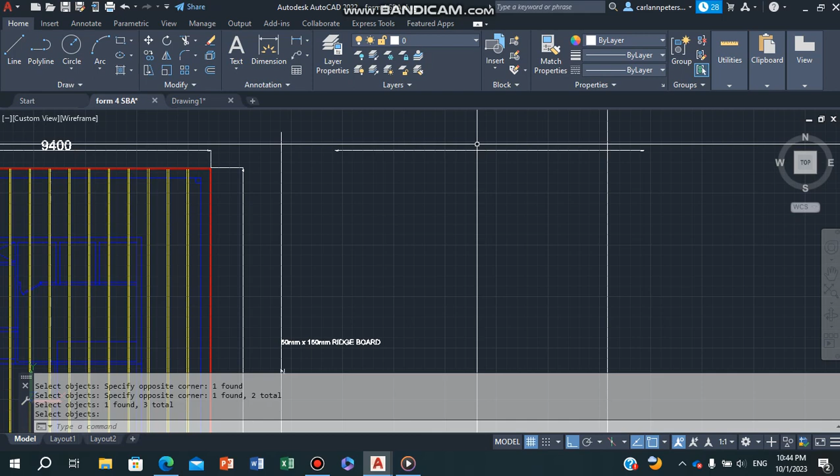So I'm going to explode it, enter, so that I can now remove the line here and the dimension figure. I am going to move or copy my leader line, put the tip of the arrow.

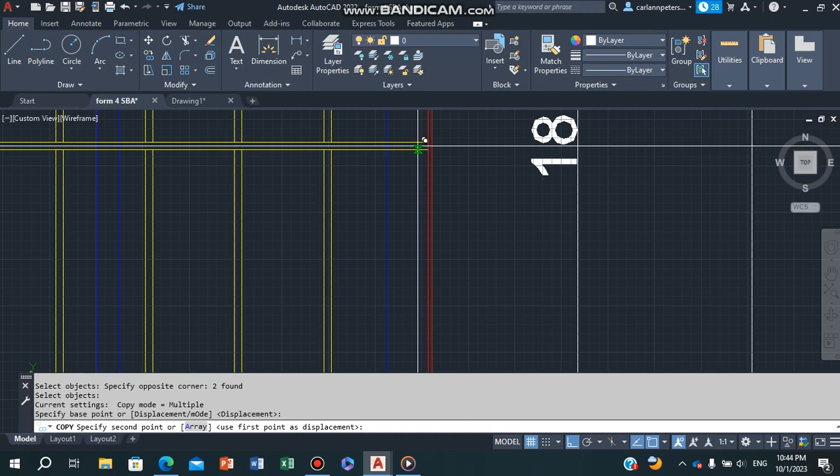What I want to show is, alright, I prefer to do it this way. This is my ridge board, so this is my ridge, so I draw the line. Where is my line? Where is my arrow? So I put it towards the middle here. Where is it?

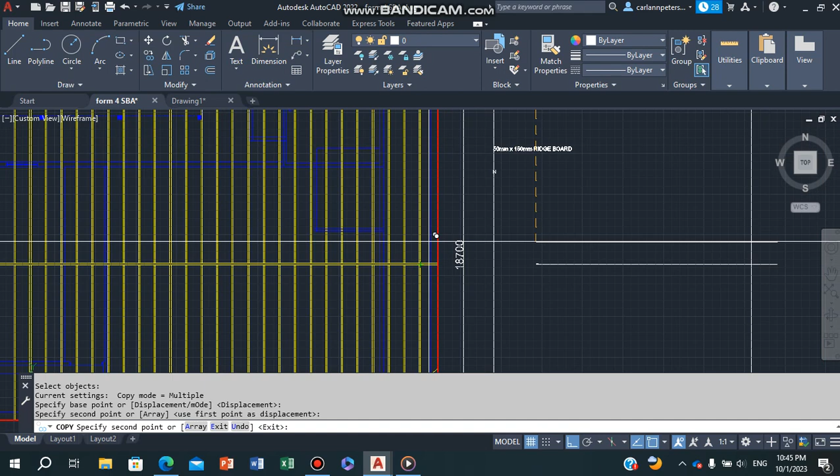You see, they want to show me to show a particular point. So what I will have to do is, alright, I will have to rotate this. Rotate.

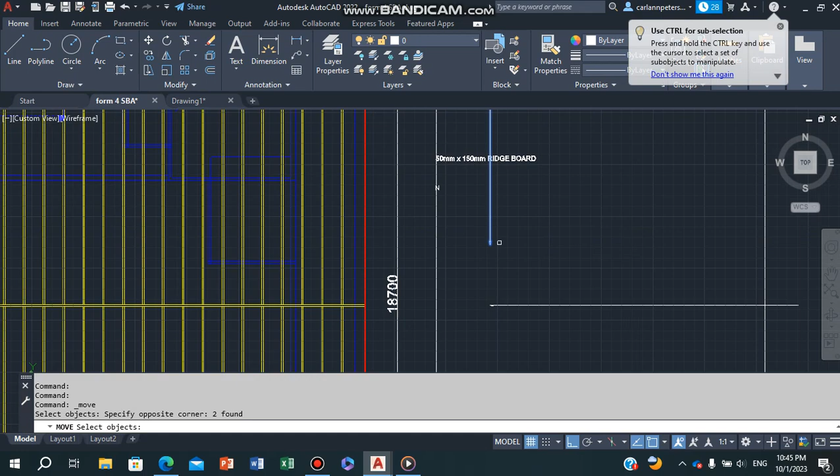Draw it vertical like that. Right, I rotate it and then I'm going to move. So I'm going to move this, take it from the tip, and I'm actually showing my ridge board. So the ridge board is this particular line.

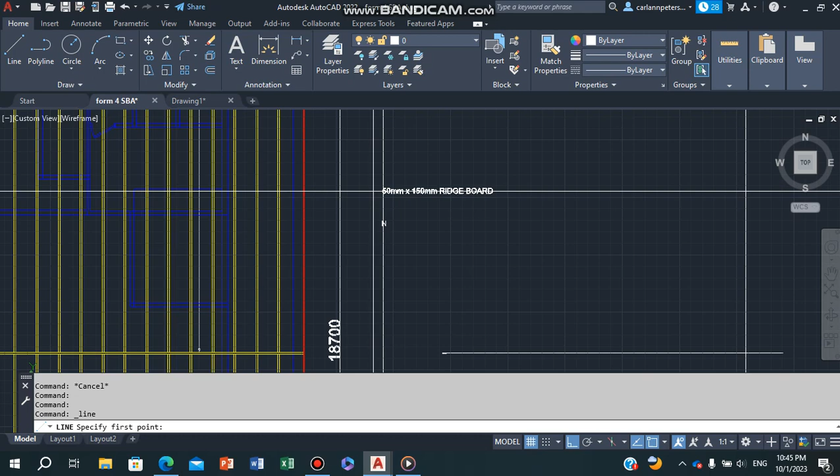So that arrow actually wanted to show a particular line, right? So let's follow, it comes from here, and I want my note to come from the ridge board to the notes. So I want to draw my line like that, and then I'm going to fillet it.

So it's the same thing like how you place notes for biology and so on, where you don't have notes crossing each other and so on. So the same procedure here.

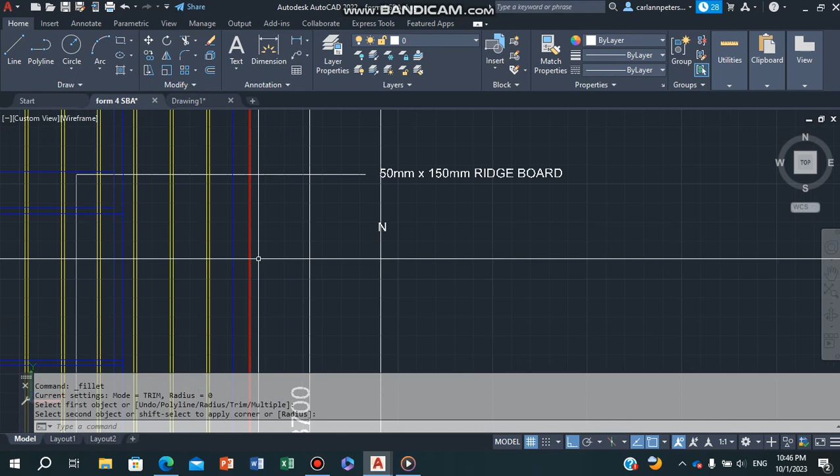When you're doing the corrugated metal sheeting, you will have your corrugated metal sheeting, and you will have your arrows to come to show your corrugated metal sheeting and so on. So that is how the notes and so for this will look.

And you put in all the other necessary items. Your second sheet is sheet 2, and then you have so you had floor plan, and then the next one will be the roof plan.

So I'll guide you with the other aspects of this, but I want you to be able to dimension, put on your notes, and so put on your arrowheads.

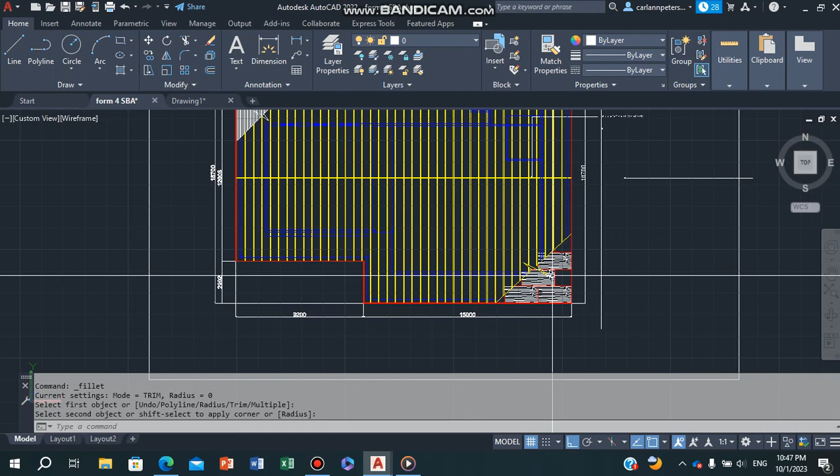Remember to finish your corrugate, not the groove ply. So try and finish a groove ply, and then you would trim off and so on, so you make it look good. So make sure you have your proper layers and so on. That is how you go about doing the roof plan.

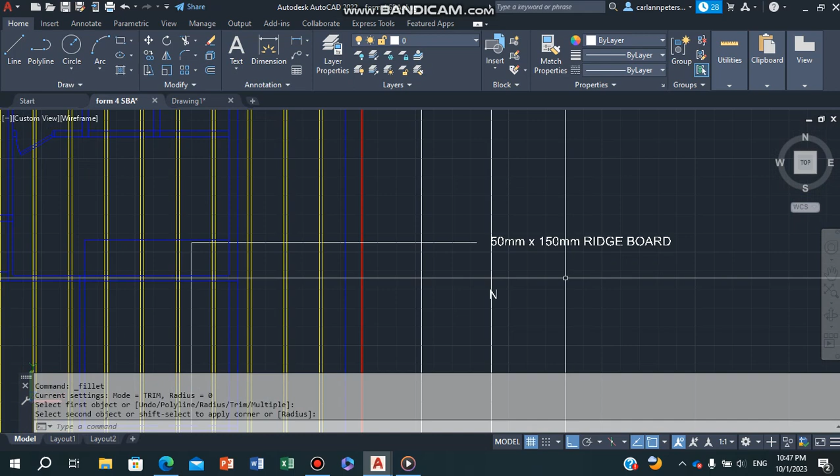If you have the hip and valley, you will simply have a little more notes. One will say the hip, and so 50 millimeters by 150 millimeters hip rafter, and the same size for the hip jack rafters, and I'm going to guide you with those, but at least go ahead and put in all of your necessary notes and all your captions and so on that will accompany that drawing.

Alright, so I'm going to extend this here now. Extend, back to extend this, extend this, extend this.

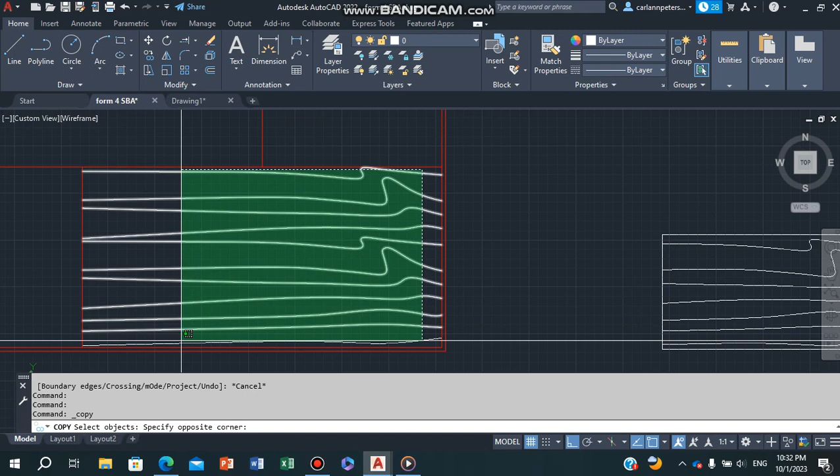So what I'm going to do now, I'm going to copy all of these here now. So I'm copying all of these, enter. Then I'm going to take it from a corner point, and then I'm going to go to this corner point. Make sure it go to the correct corner point, and so on.

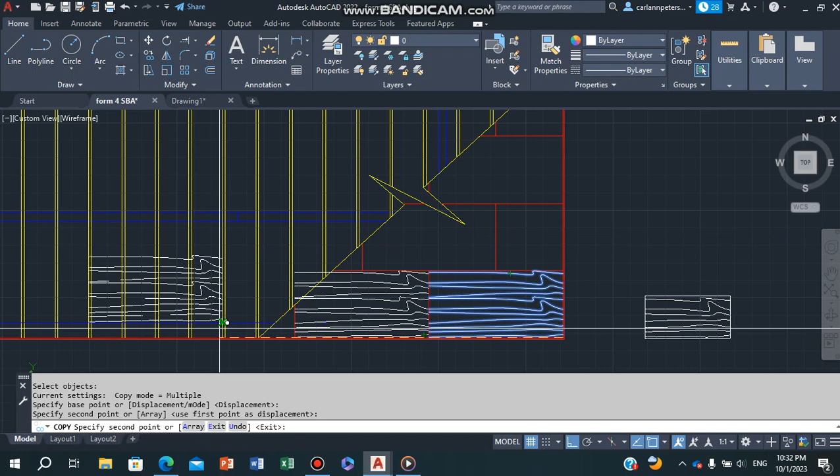So what you will have to do is to clean up whatever extends on the outside of the zigzag line, and you're going to fix that up. So you're going to go here again, corner here, right, this one, corner here, and then we trim off.

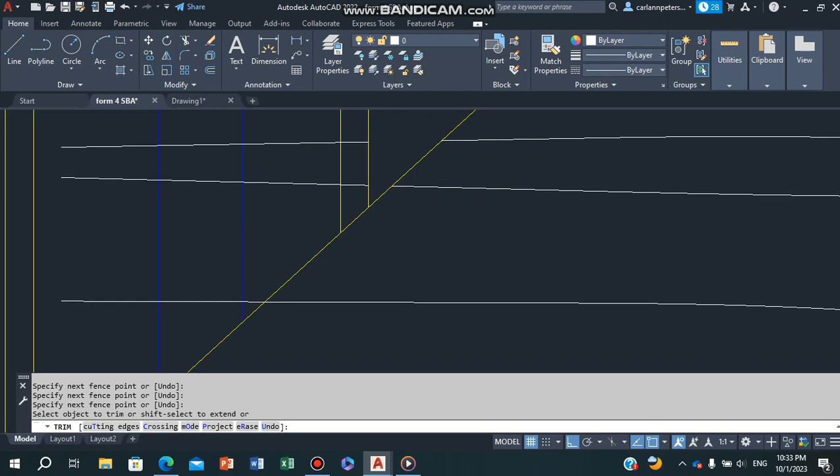So some of them will require for you to trim more than others. Alright, so you trim off, and so that it stays within the zigzag line, because that's a portion that you indicated as your ply, so you cannot go outside of that. So the others you can erase, right?

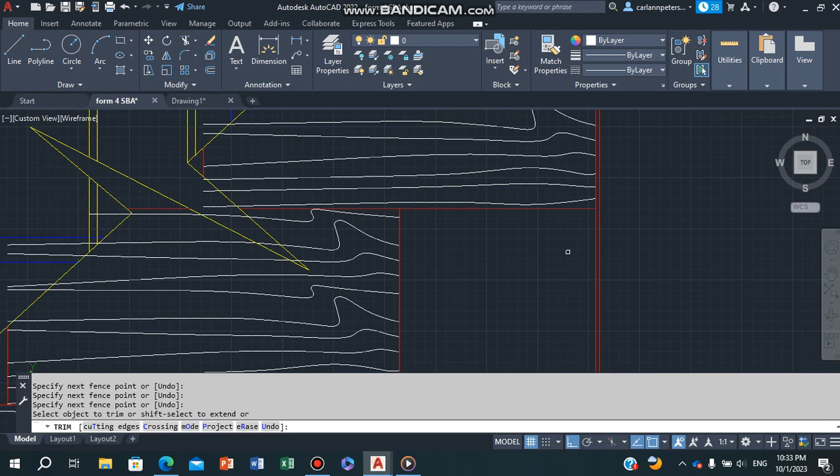So that's basically how the pattern here should be done. Do not let one pattern run into another, so you don't have pattern here that's running back into here, so you may have to do some cleaning off and so on. Alright, so you'll have these.

So I just want to move now to dimensioning. I'm going to go to annotate, dimension, linear. I'm going to start from my longest point. So that's my longest point, this side is my longest point.

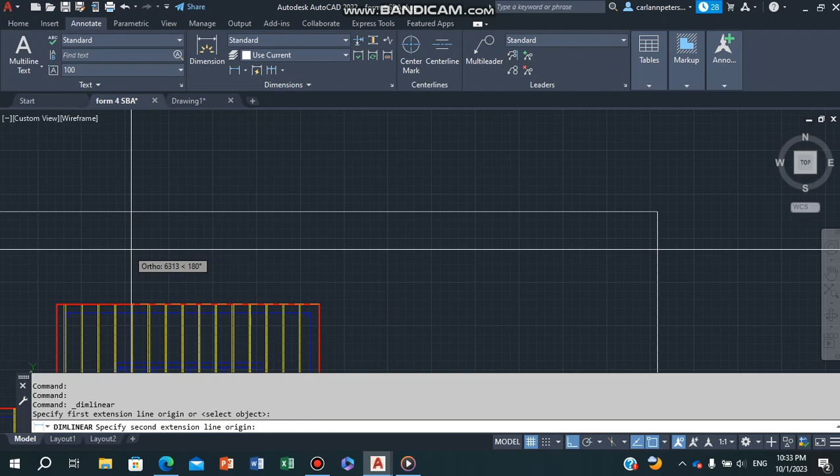I'm going to zoom to my endpoint now. Use your same layers that I taught you, the blue and so on. Your distance is 1000, enter. So you have your first dimension line.

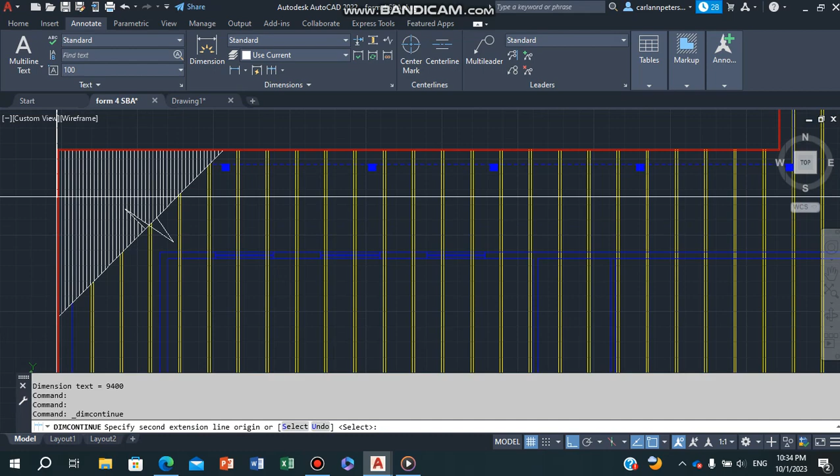All right, then you do continuous, and then we go to the next endpoint, next endpoint, escape. Then I do my total, endpoint to endpoint, and that distance will be 1000.

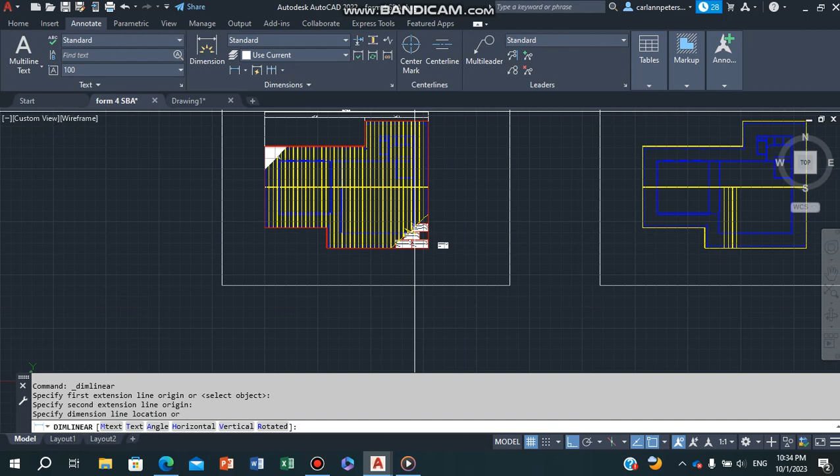Hold on, try the distance to be 1005, enter. Why is that one line there? When they undo.

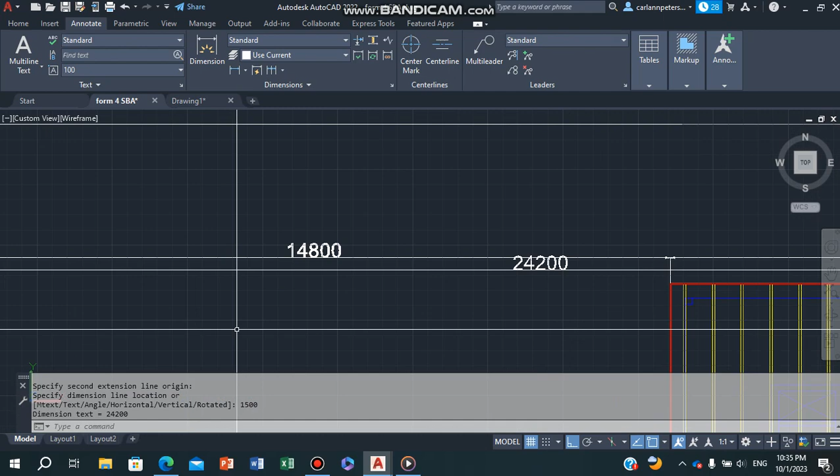So endpoint to, I may have to pick straight here because I think so. Pick, and we go up 1005, enter. Right, I don't know why mine's clicking in the bottom there, but yeah, so that's how this one is done.

Let me just go back home and take out this. I don't need this pattern here anymore, so I'm going again, annotate.

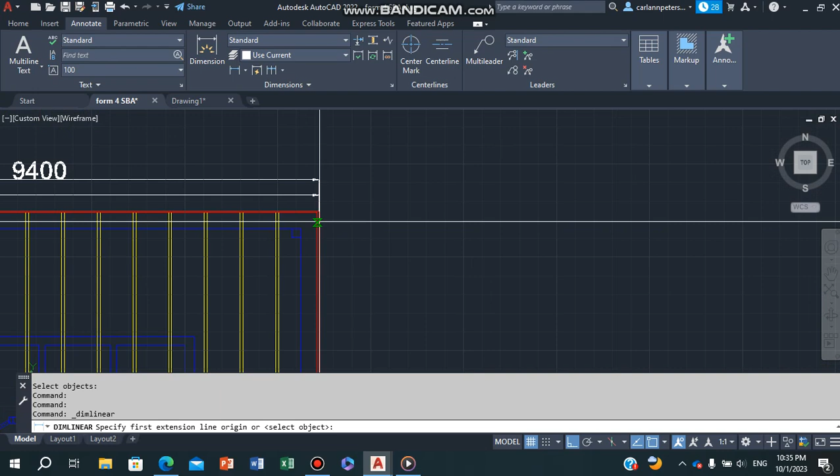Endpoint, so I have to go back and fix this here. I don't know why it's going there.

Endpoint, 1000, enter. Right, next one.

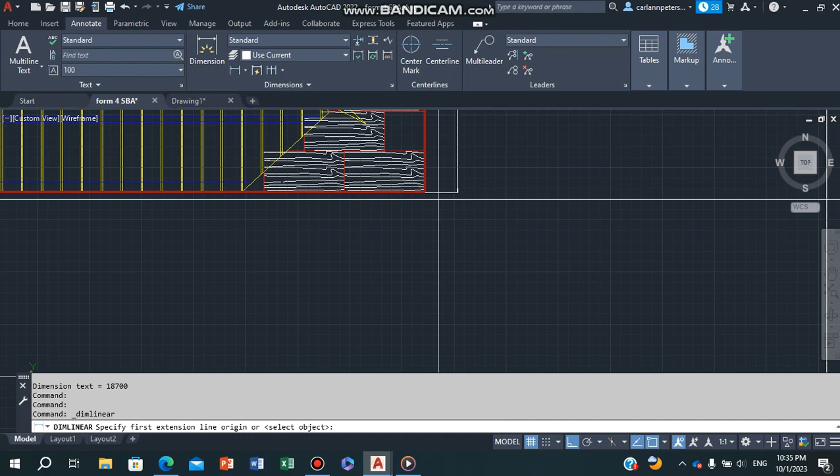Endpoint to here, because there's another turn here, or another corner I should say as well. 1000, enter, and I do continuous, and I select this point there. Right, next.

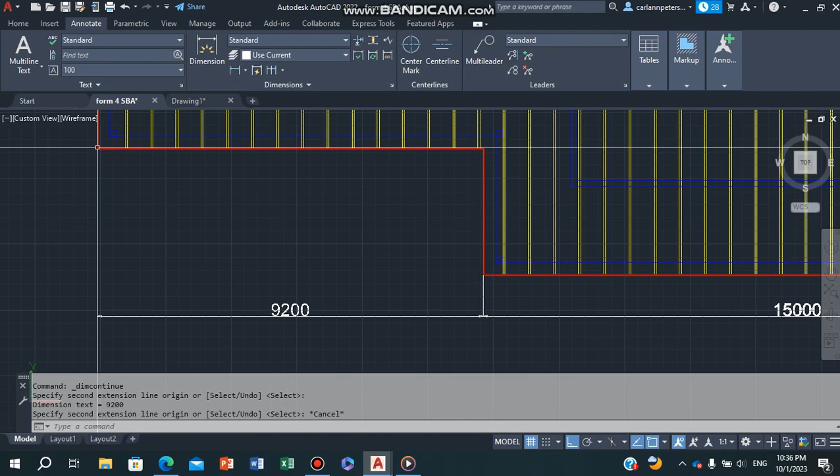So use your same colors, you know the dimensions are blue, and so I need to erase. Let me go back and take this off. There's something end up right.

So you're doing dimensions on all four sides. So you go in dimension, annotate.

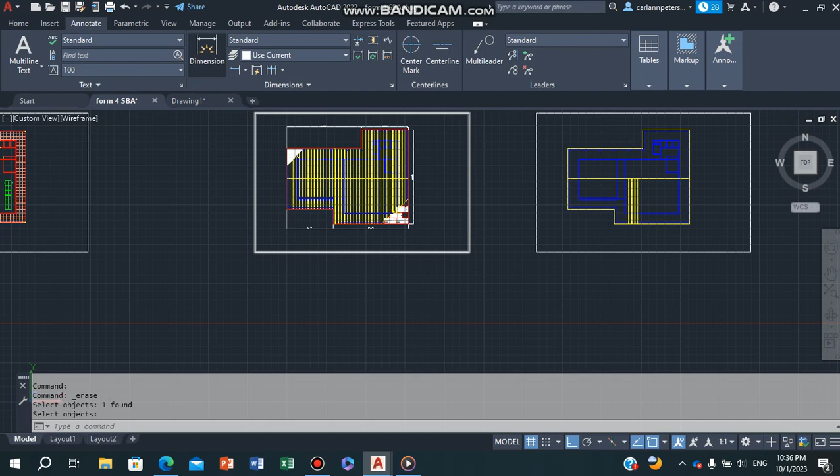Dimension, and this one I have for my longest point here, so I pick there to here.

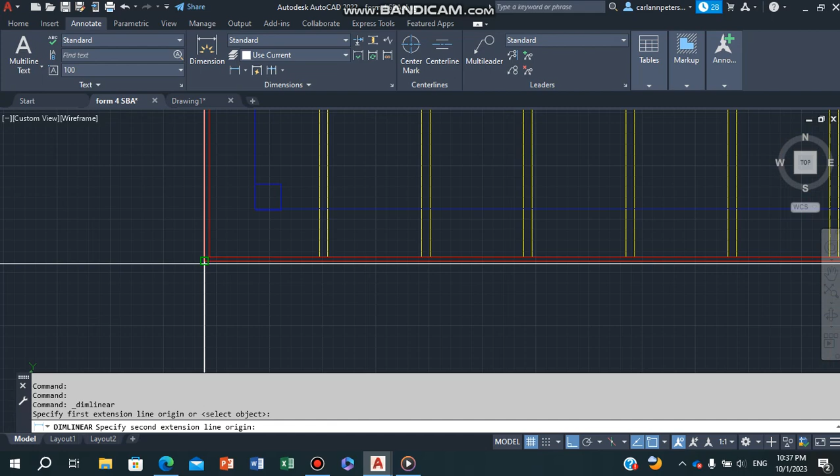It's up, actually I should take this, sorry, let me take it from this point here first. So I take it from this point, endpoint to endpoint, 1000, enter, and then I do continuous.

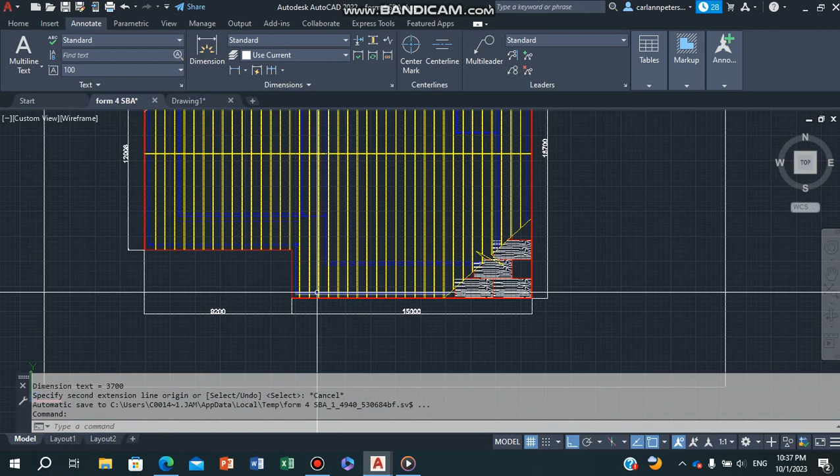So that continuous will take me from here, endpoint. Notice I also have this point here, so I go from here, endpoint to this endpoint. So this may not apply to everybody, so it's based on your design, right?

And then you have your total, so you do a total, you can go from so I'll start from this point because I find when I did it where I took it from there, I wasn't getting it.

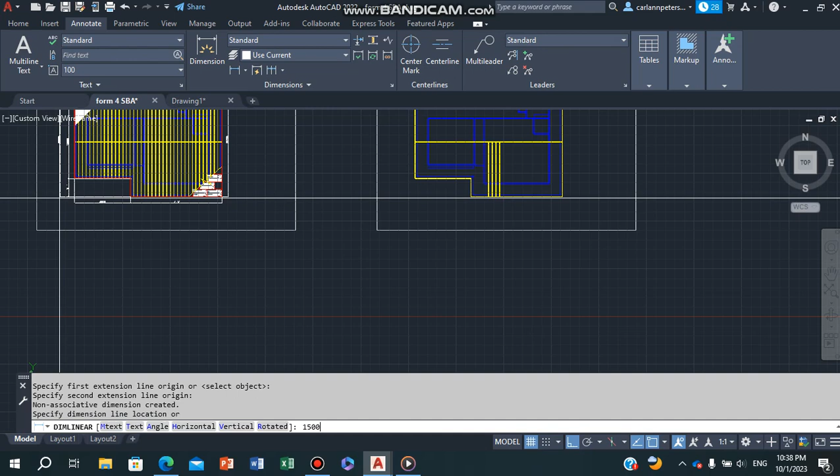So, 1500. So that more looks like it.

And then you have the same thing happening here on this side. So each side, even if it's the same dimension, you do two dimension lines on each side. Right, so once we finish with that, we're going to put on the note.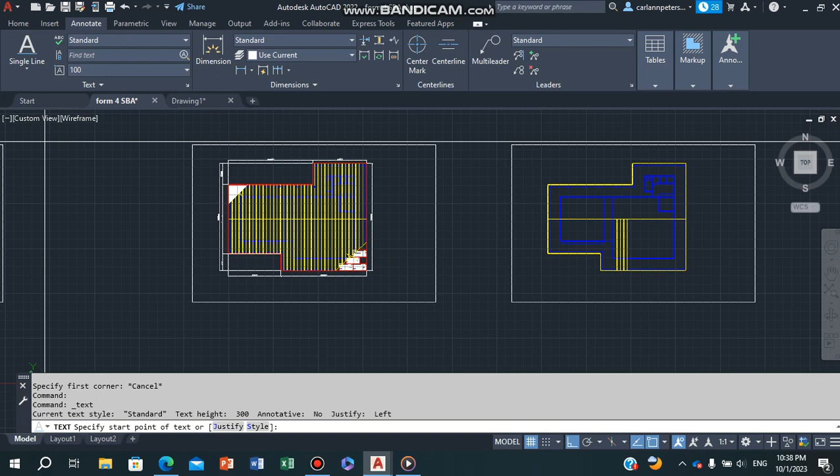So I'm going to go into, go to down arrow, we go in single line text. Remember we did single line text, counting single line text. All right.

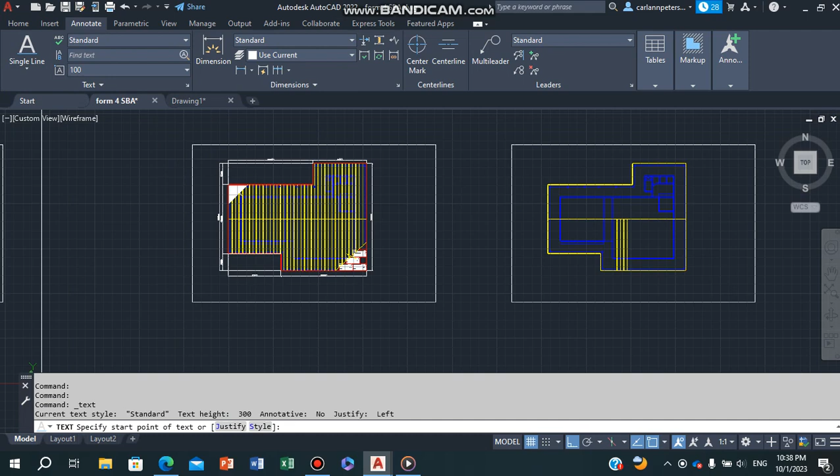Oh Lord Jesus, what did I do? All right. All right, so single line text. It should be popping up there. Oh, I think because it's, I probably have mine already set.

Oh, sorry, right, text. So you go in here, you will put in the height. So the height of the text is 150. So let me do that again.

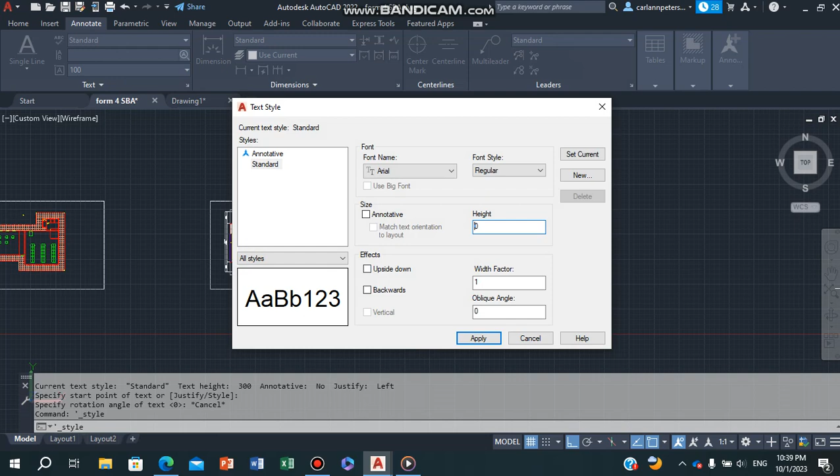So I'm going here, single line text, right? And then we go down into text, slanted arrow, right? And then we're going to put in the height. Our height is 150 for the height of the text, 150. All right, you set as current, yes, and then we close, right?

And then you're going to type in the information there. So the picture that you took on the board, that's what you're going to use. So that's the different names of the rooms. I'm going to pick my point. Right, so I select my points.

Right, and then I'm going to type in 50 millimeters by 150 millimeters ridge board. I'm going to put some cap lock. I have my light on, so ridge board. Right, that's not a B. I can't. Right, so ridge board.

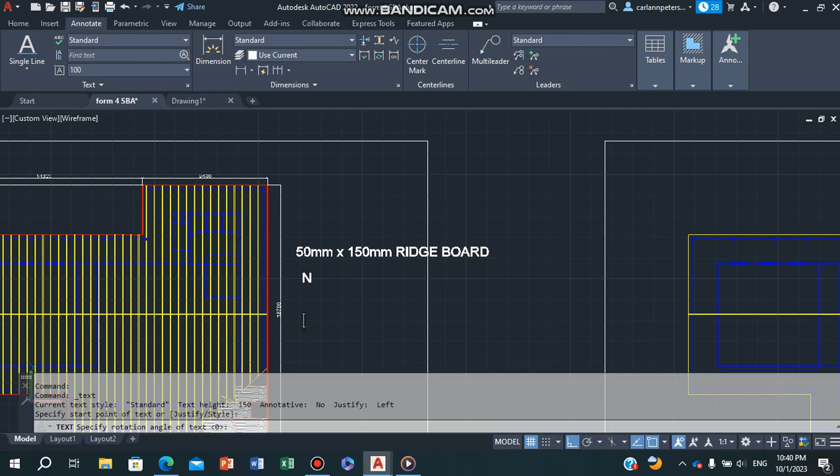Once you finish with that, you pick somewhere else and you type in what else you need. Next point you need, pick and type as well. And then once you finish, you just X off this. Now it will be smaller, so don't expect it to be like this. And then what you will do now, we will take our notes here now.

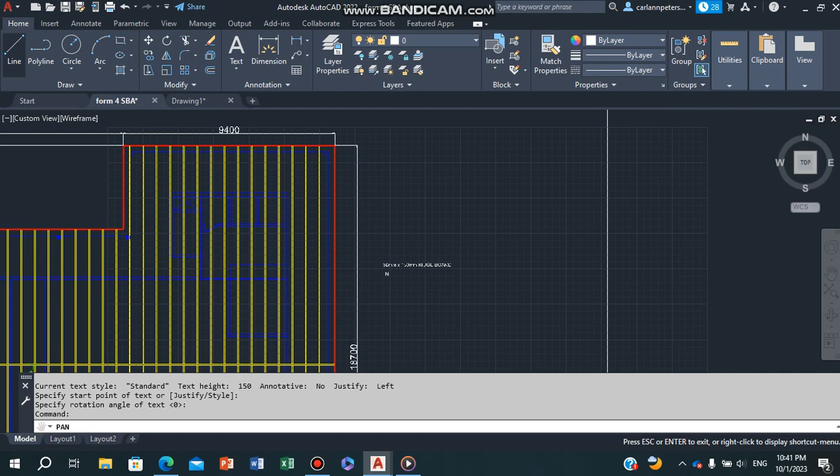So you take the notes, and you put them. Let me draw a line first because I want my notes to align. It is always neater when you align them. So I do a line like this, and then I bring my first line. Look, I put my first note on the line.

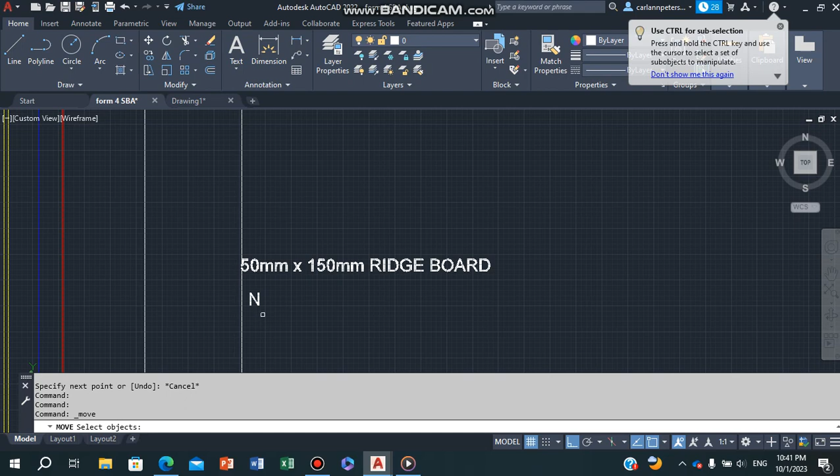The next one you're going to just move it onto the line. I only did this, but now you have all the notes here. Now I'm going to copy one of the dimensions.

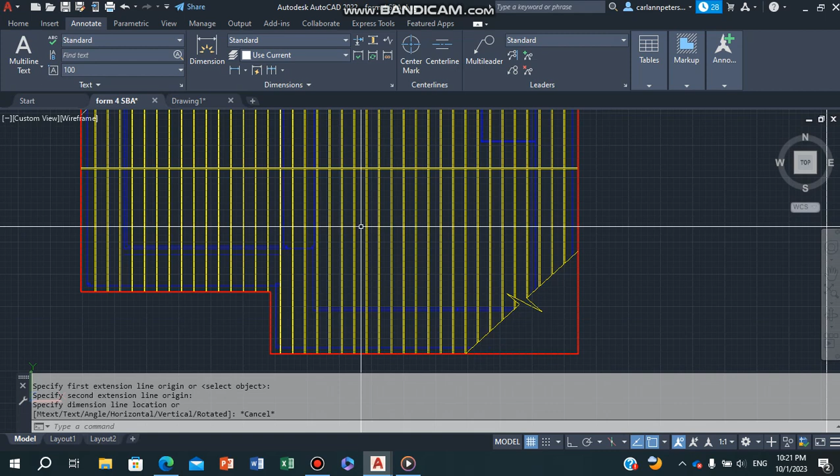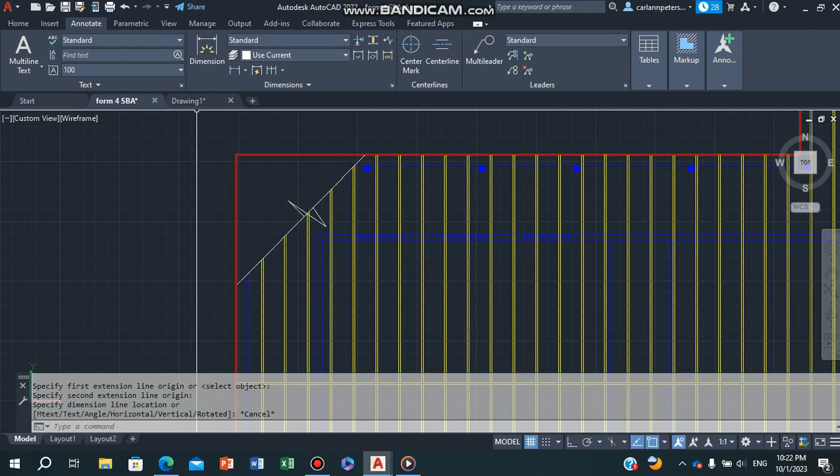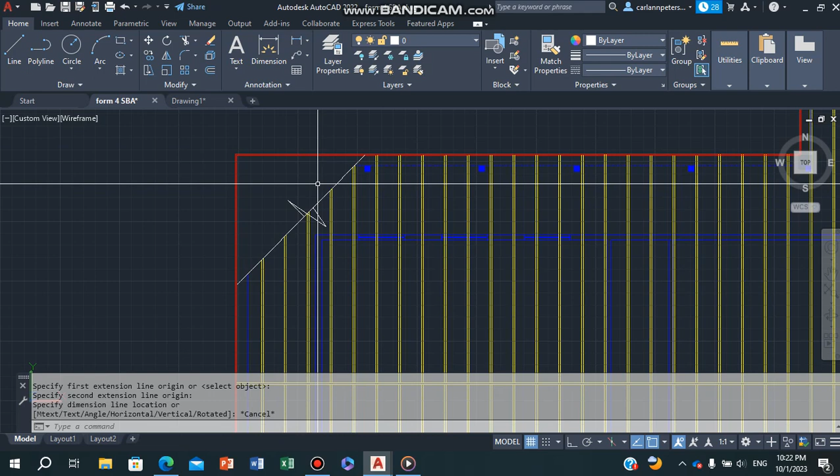For the groove ply, we're showing that our roof has to be sealed. Now I'm going to start with the corrugated metal sheeting, which is basically galvanized, and we're going to do a hatching. So we already did our section to show the corrugated metal sheeting, followed by a zigzag line which shows a portion off, not the whole thing, just a portion.

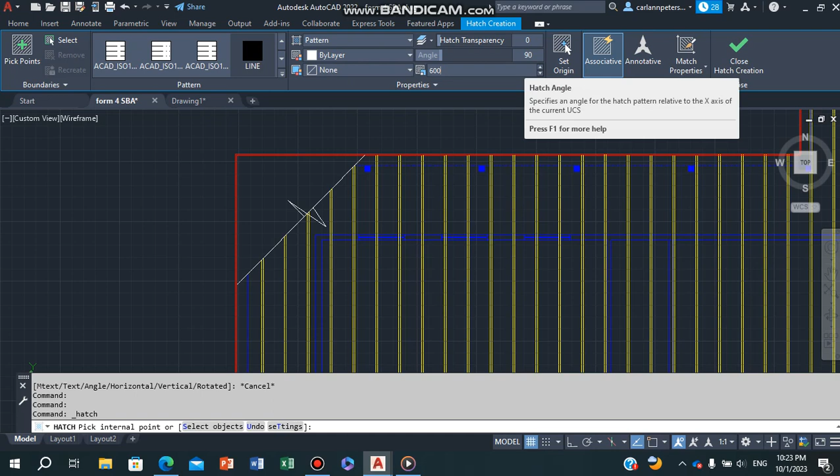So we're going to go into hatch. Mine is already loaded, but if you go to the down arrow, you'll look for line. So I have mine as line. Before I apply line, I have to set a scale. I'll use a scale of 600, and my angle is 90. I already had mine set up, so you most likely will see 0 there, so you put it as 90, and I'm using 600. As I said, different computers will give you different resolutions for how it looks. Once I do that, I apply it.

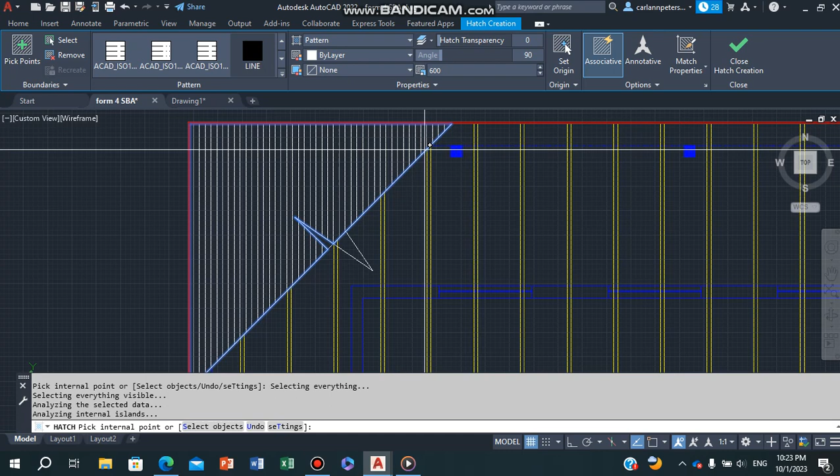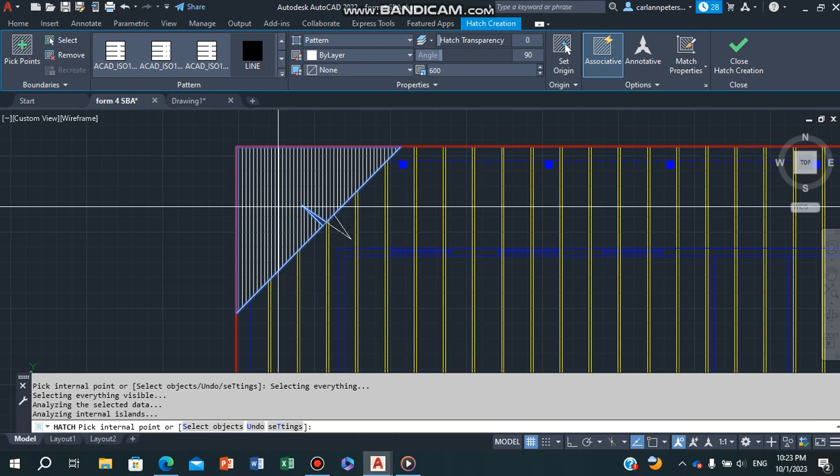Now the reason I use 90 is because my vertical lines, or my corrugated metal sheeting, should be in the same direction as my rafters. So it must be in the same direction, hence my corrugated metal sheeting is done vertically. Now if your roof was done in the opposite direction, your corrugated metal sheeting would have been horizontal, but always remember it follows the same direction as the rafters.

Alright, so I'm going to move now to our groove ply. This is another section area here, another zigzag line, to show that this roof has to be sealed by placing ply or groove ply on top of the rafters.

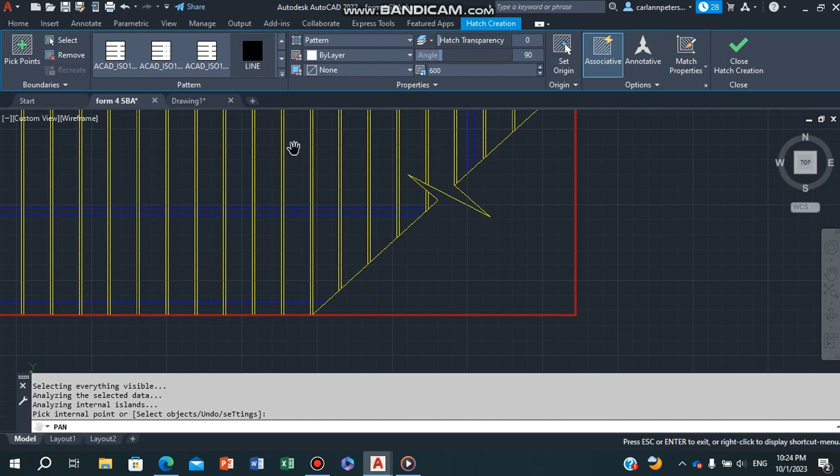To do so, I'm going to go back to home. Now the size of my ply is 4 feet by 8 feet, which is 1200 by 2400. So I need to offset that distance, but if I have to offset the distance, you'll notice here, because we had polyline, we already did mine before we started, but your polyline, if you have to offset your distance, your polyline will continue, so this line will continue with the two internal lines, but mine is already exploded.

So if yours is continuous, still polyline, you're going to go into explode, and I'm simply going to pick the polyline, the inside line, and then you will get them separated, as you've seen here now, right? But it was not separated before. So now I can offset my distance.

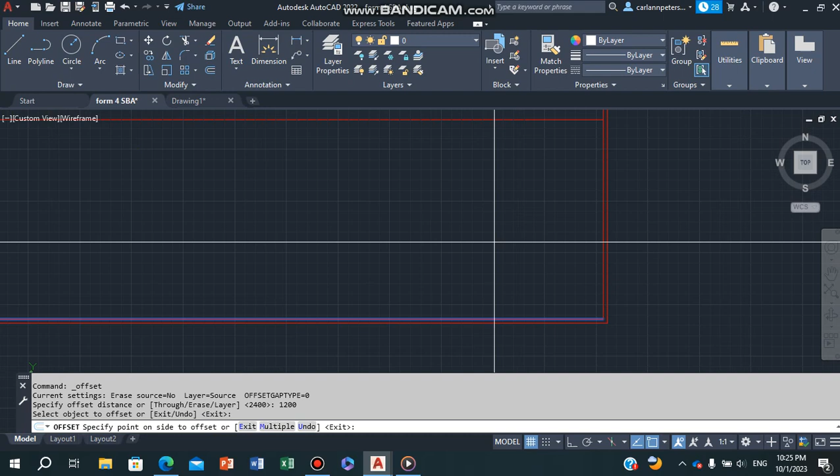I'm going to offset. The ply is 1200, enter. I'm going to go from that inner line, up 1200, and do as much as can be placed within that section of my zigzag, 1200. Now if I were to offset another 1200, it may fall outside. Alright, so I have enough here.

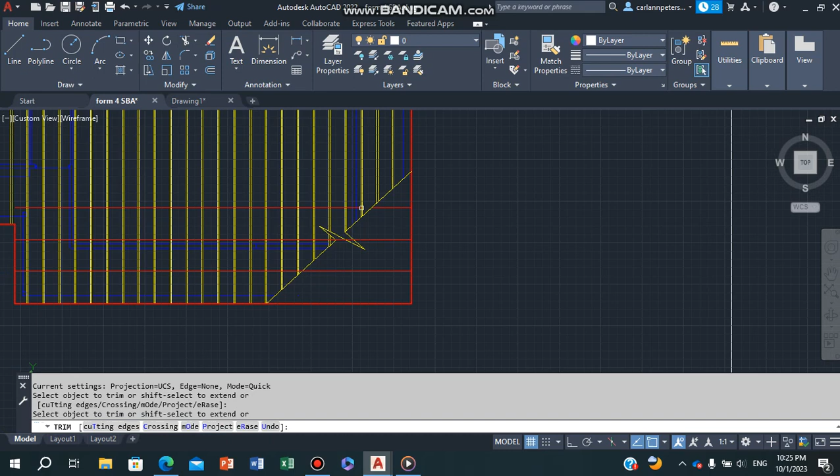So now I'm going to trim. I'm going to trim this off, trimming off on my zigzag line. I may need to trim off this piece in here.

I will need to trim this piece here, and then I'm going to erase the other lines. So I take this off, press, erase, erase, erase.

All right, next direction. Remember we just said the ply is 1200, which I offset 1200, 1200, and so on. Now if you have a very small space, you may not be able to show as much as you've seen here in my drawing.

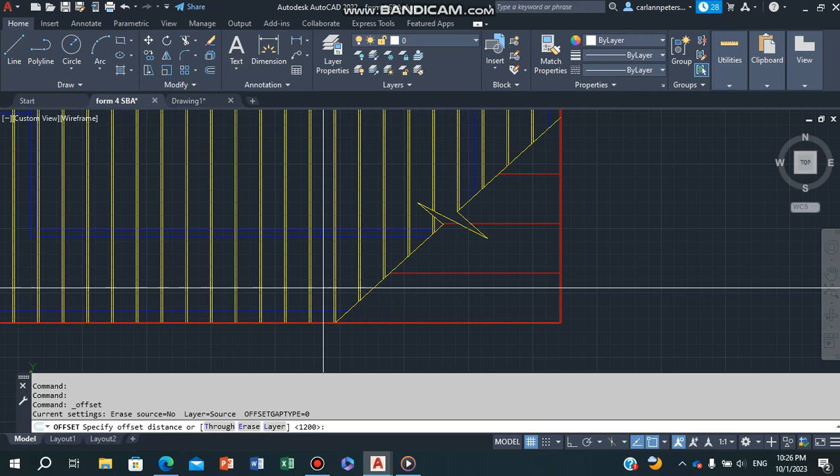Because I have a bigger section, I'm able to see this much. So I'm going to offset now the 2400, so 2400, enter, and this I'm taking from the internal line, and I'm going to offset now 2400, 2400. Notice where mine falls. So I'm going to go again, and I'm going to trim this off.

I'm going to trim here because remember your ply must be done in courses. So I have these two accounted for.

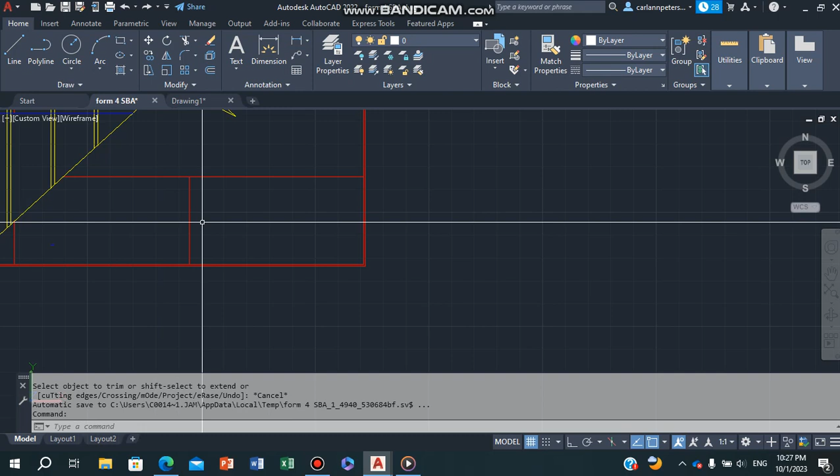Next row here now. So I'm going to offset again, 1000, 1200, enter. This time I'm taking it from the internal line and going this way. I'm going to trim this off because remember it should look like a kind of brick effect.

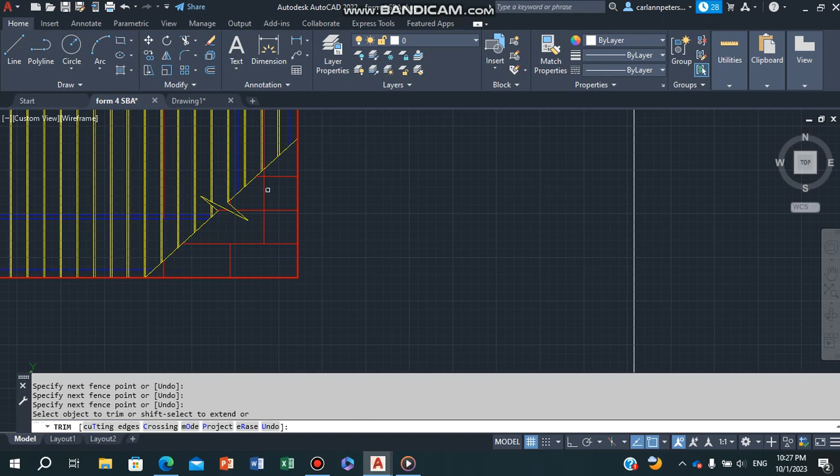So take this off and I trim this part here, and then I'm going to go offset again, 2400. Remember the ply is 4 feet by 8 feet, and I offset here again, so that I will need to trim off this piece of line, and I could erase the others.

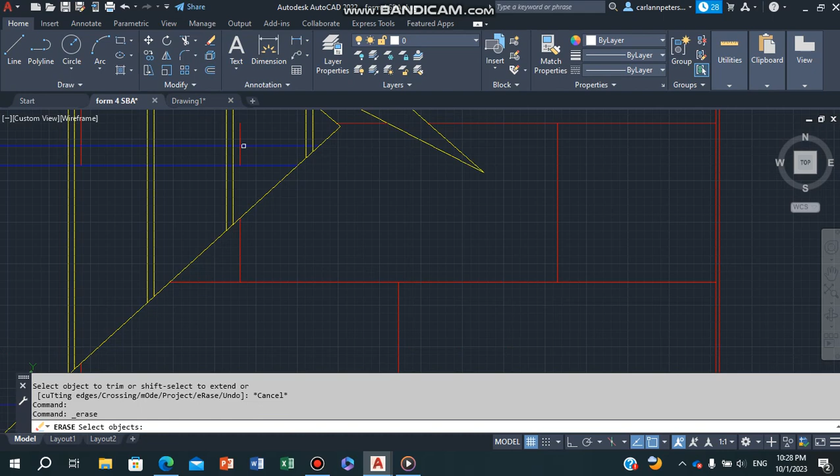So I now can erase here, and I will also erase this red line here because this red line came out from the top, the bottom there. Alright, so that's, oh, I still have to trim. I have another piece I need to trim, this piece, right?

So this here is my ply, ply, ply, ply, ply, and so on. Now what I'm going to do is I need to show a symbol that will represent my ply board.

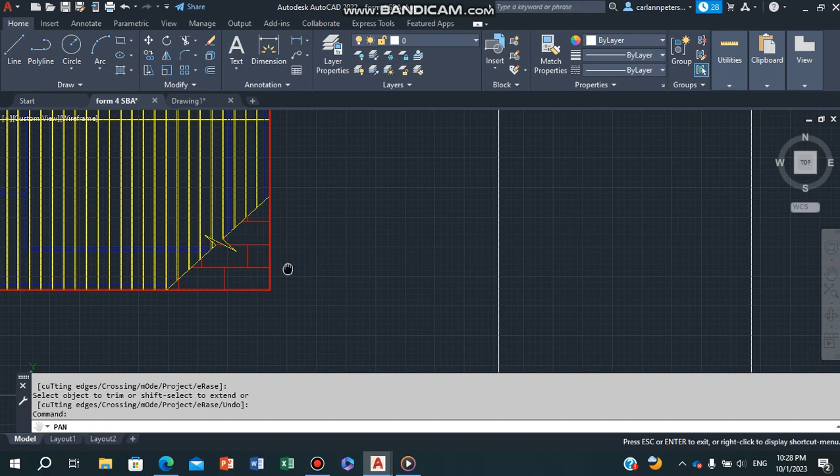So I'm going to go in Control 2. Control 2. So Control 2. Oh, sorry, I was doing the wrong thing. Control 2. So I'm going to take the table, right?

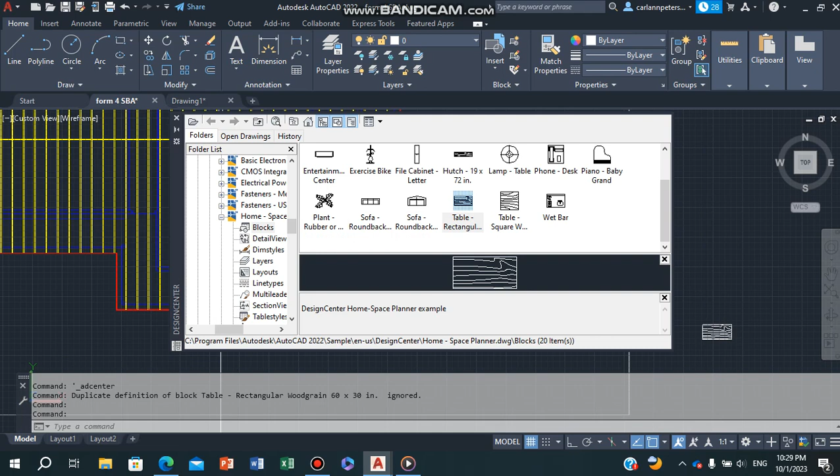So you're going to go in where you get your sofa and these, right? You just go and get your table and put it on the side, and then you're going to X off that, because what we want here is a pattern. So this is a pattern of border.

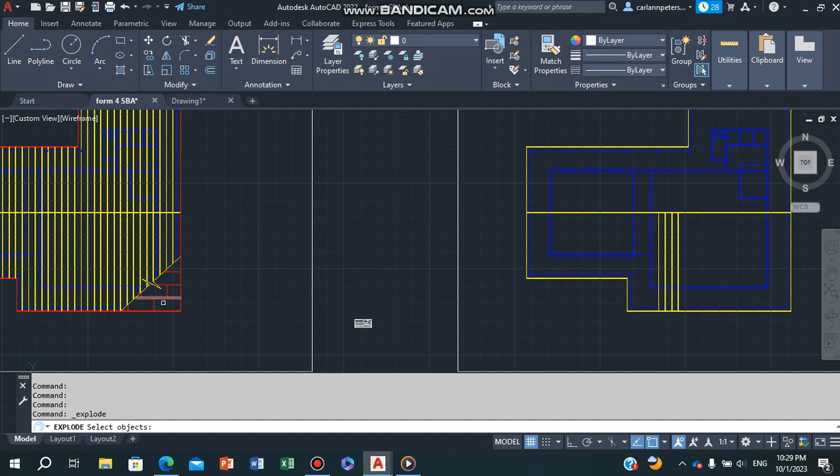So I'm going to copy this here now, but to copy this I am going to explode it. Why am I exploding it? Because there's a pattern here I need to apply to this area. So if I had to take it as is, we would get the entire tile, which would be a little smaller than the area for the ply.

So let me just move this closer so that you will see. I move this closer and zoom. So if I were to copy this and put it here, you notice it's a little smaller than the ply. So I need to explode that again, explode it.

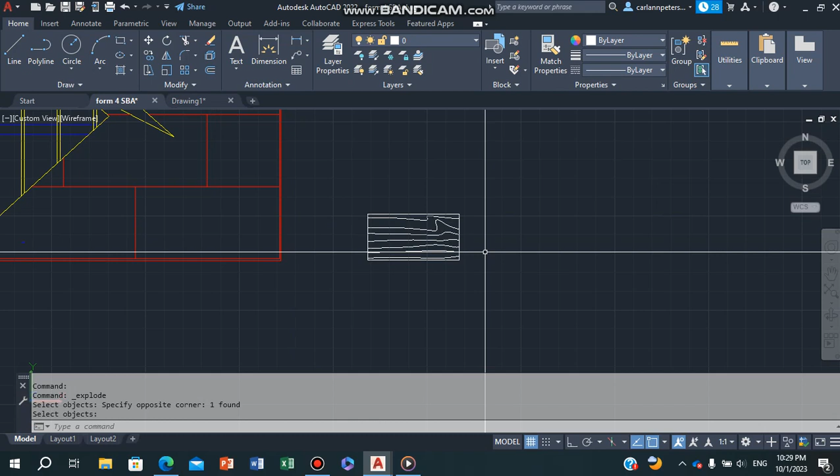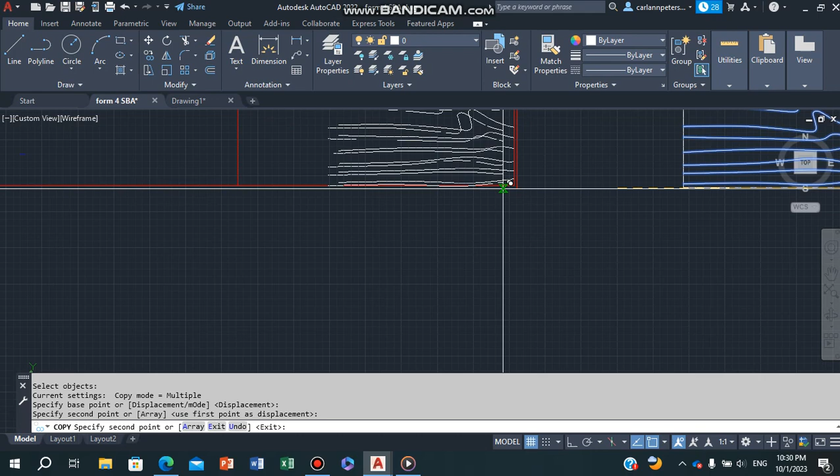Now when I explode it, I'm able to take only some of the patterns. So what I can do is copy now, taking only the patterns, not the entire thing. I'm copying this, pick enter, take it from an end point here, and then I'm going to go to this end point here.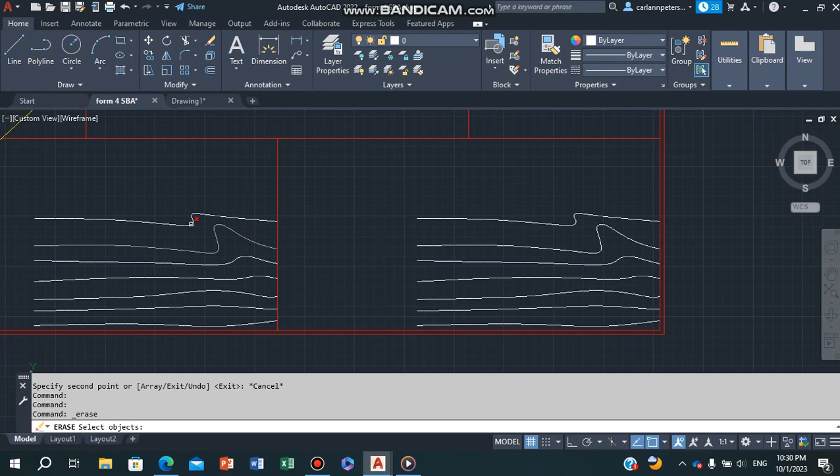So that's a pattern here. Then I'm going to go here, take the pattern, the corner here, take a pattern there. Or what you can do is fix one pattern and then copy the others. So let's say I want to fix this pattern here, then I could copy. Let me copy some of those because I need to cover my bases.

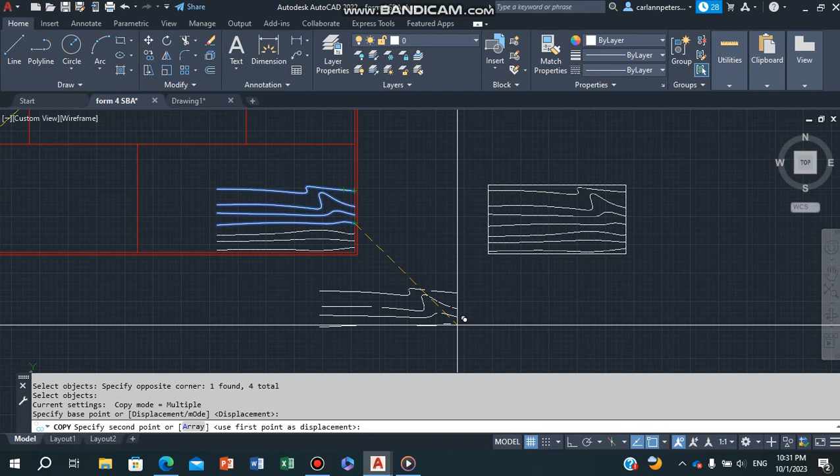Alright, let me just move this. So copy. I take about 3 of those, take it from this line and then take it straight. Let me put back perpendicular on, and so I take it back on this line.

Notice here I still have some other pattern and thing I need to show. Let me see if I could extend it. Some of them, yes, so some you could extend. So it might be...